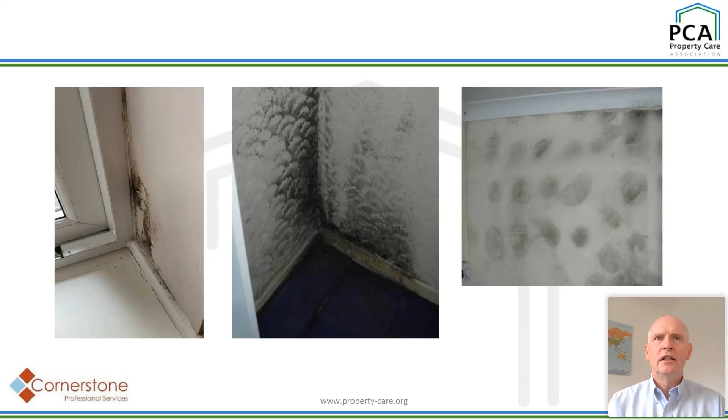There's not many certainties in this world, but there is, unfortunately, one, and it's that in just a few months' time from now, millions of people throughout the UK will be living in homes suffering from condensation dampness. Mould growth, streaming windows, damaged clothing will be found in homes up and down this country. It's been happening for decades, and if we're truly to deal with these symptoms, which can range from just being a minor irritation for the occupants up to, in seriously affected homes, some heartbreaking and tragic consequences.

Now, there's many factors which can contribute towards condensation dampness, and we all know that a lack of adequate ventilation is often a very significant one. There's no doubt that there's been good progress made in the last decade in terms of improving the knowledge of those of us involved in trying to provide adequate ventilation to UK homes. But the big question is, are we doing enough? And if we're not doing enough, what else should we be doing?

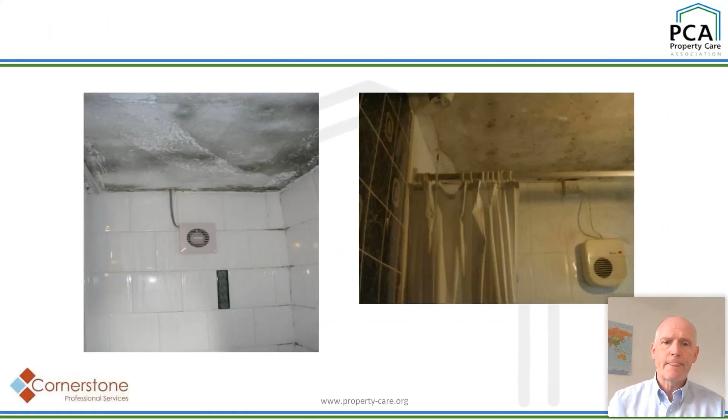So the course of the webinar this morning, what we're going to cover is we're going to look at what level of training and qualifications do we have at present in the UK? What do I think the level that we need to have and why we need it? And how and where can we get what we need?

So what level of training and qualifications do we have at present here in the United Kingdom? Well, I want to go a wee bit back in time, because the year 2010 was the origin, really, of what we have now. Back in 2010, I was entering, shows my age here, my 4th decade working in the ventilation industry. I was running a small ventilation business that was involved in going out into existing homes and trying to tackle condensation dampness problems.

There was a lot of new build going on back in those days, and we were fitting ventilation systems in new build homes, in particular mechanical ventilation with heat recovery. And we were getting involved in all sorts of specialist stuff. So that's what I was doing back in 2010.

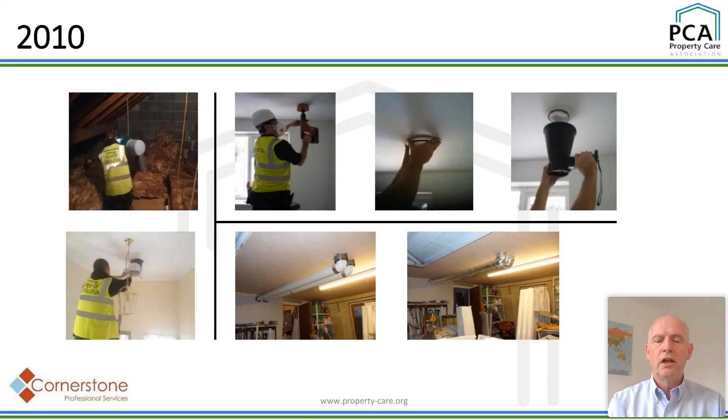In 2010, approved document F, which deals with ventilation, was published, replacing the 2006 document. The intention was to raise ventilation standards because, as mentioned earlier, for decades there had been problems with condensation and mould. That document was well regarded, looking at things like occupancy levels and giving good guidance with plenty of diagrams on how ventilation systems should be designed, especially focused on new build, but with some advice on existing dwellings too.

To complement that, a Domestic Ventilation Compliance Guide was also released, giving good information to people involved in the design, supply and installation of systems, especially for new build homes. It was considered a document at the time that would help raise the quality of installations and systems, particularly in new build homes, but also in existing homes.

Back then, an organisation called Polypipe, in conjunction with BPEC, launched the UK's first independently certified and accredited domestic ventilation installers training course - emphasising the word installers. That was to support the new approved document F and the domestic vent compliance guide. I was honoured to join a group of esteemed, knowledgeable people to speak at that launch, as someone considered, without sounding conceited, to know a bit about the design, supply and installation of ventilation systems as a contractor.

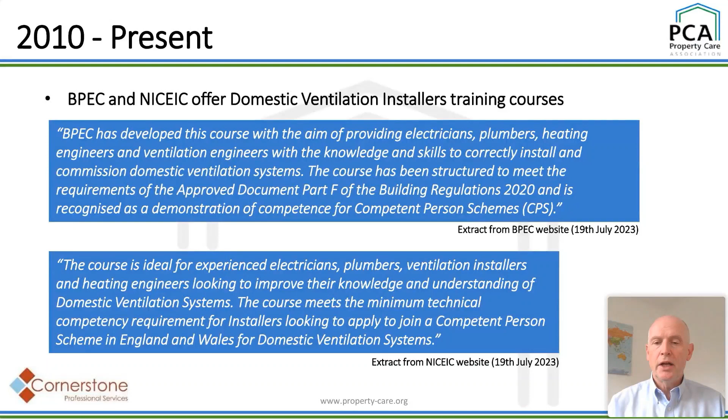What else has happened? If you look at what's currently available - remember when I talked about the origin, the very first BPEC course - we now have BPEC and NICEIC offering domestic ventilation installers courses. I've put up extracts from the various websites promoting these courses. It's a 2-day course, a good course if you're an installer who wants to be involved in designing, supplying and installing ventilation systems. But again, from the experience I have of people who've been on it and the feedback I've had, it's very much focused on new build homes as opposed to existing homes - though both organisations offer a very good set of courses.

If you look at what those courses can lead to in terms of qualification, and why they link to something called ventilation competent person schemes - on the left of this slide you can see a copy of a certificate for someone who passed that course this year, 2023.

You probably can't see, but if you were to look close enough, you'll see that it actually refers to the Domestic Ventilation Compliance Guide 2010, which I think is quite interesting, bearing in mind the new approved document came out in 2021 and came into effect last year, 2022.

But that's the type of qualification that's available to installers just now to join what would be called a ventilation competent person scheme. That would be the qualification ventilation-wise that they would look to support the criteria for joining a competent person scheme.

And the certificate that you've got in the middle of this slide is an example of a certificate from an organisation called NAPIT, from an organisation who's applied to be a member of a ventilation competent person scheme, which in turn allows them to notify to building control ventilation installations, like the notification certificate you will see in the top right hand corner.

Now it's a requirement to notify any ventilation you fit in an existing or a new build home. In an existing home, it would be notifiable if it can be tested and adjusted, and it's rare to find a piece of ventilation equipment now that doesn't have some form of testing and adjustment.

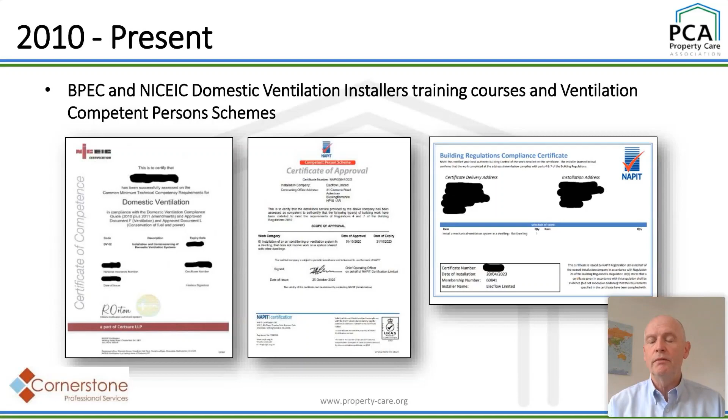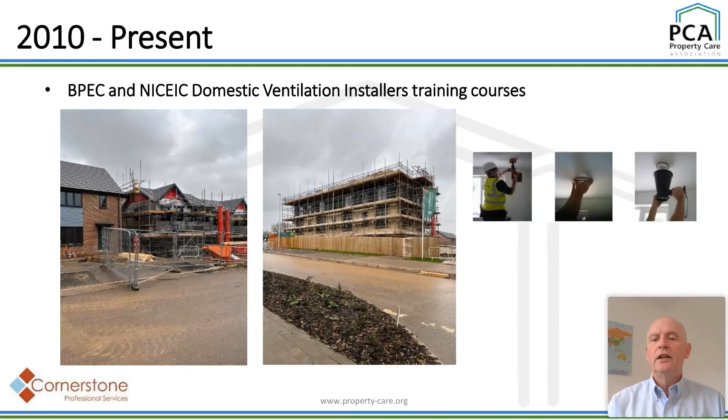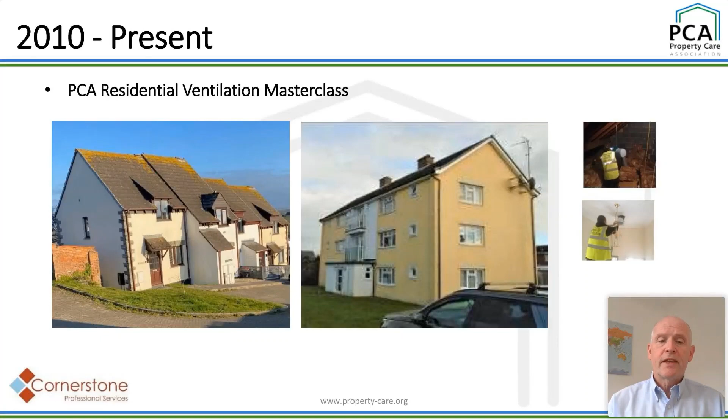I go back though to the fact that the existing BPEC and NICEIC domestic ventilation installers training courses are, in my view anyway, more suited to people looking at new build installations. When it comes to existing homes, I think that the PCA Residential Ventilation Masterclass has stood us in good stead for that as well. So that's the kind of background to what we've got just now.

So I'm now going to share with you my views in terms of what level of training and qualifications we need and why we need it. Well, I'm paraphrasing an old saying that we're all familiar with, but there's no doubt, I think, that if we keep doing what we've been doing, we'll get similar results. We've got to do things better, all of us involved within the industry in terms of tackling condensation and dampness.

I think we need more than minimum technical competency, because that tends to be what the level of qualification and training that we've had in the past aims for. And I think we have to go for more than minimum technical competency. I think what we need in the UK to truly tackle these issues is a large pool of suitably trained and qualified specialists. We need specialists if we're going to make the progress that we need to make in preventing and solving problems related to inadequate ventilation in our houses in the UK.

So if I was saying, what does a specialist look like? I think we need specialists who are capable of doing all of the following, and some more stuff on top, capable of looking at properties from the time that they are new dwellings to the time they become existing dwellings. And that's a very short period of time, remember, it can be hours before they become an existing dwelling, because as soon as people walk in that door, it's an existing dwelling.

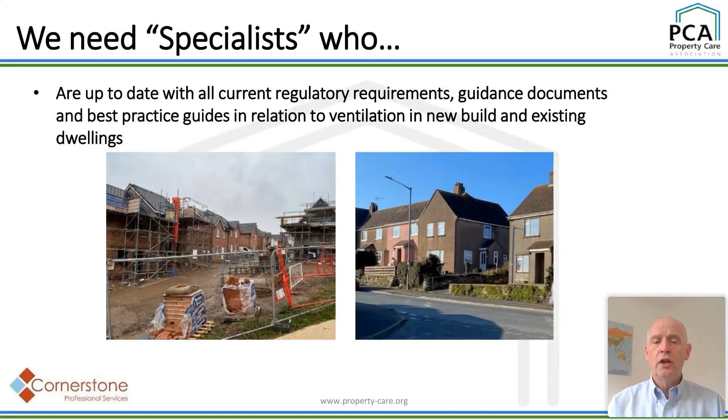I think we need people who are able to design and specify any of the three main types of ventilation, which are detailed in Approved Document F and all the other documents and guidance for the different parts of the UK for new build dwellings. They need to be capable of knowing what a ventilation system is like for a new build dwelling.

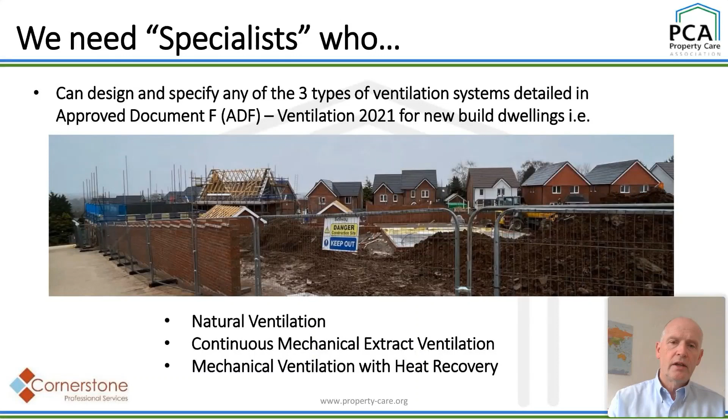It used to be called in the old regulations background ventilators and intermittent extract fans, but that is essentially a natural ventilation system. It's a ventilation system that relies on background ventilators, the most common of which would be trickle vents, and windows and doors left open during winter to allow the building to ventilate naturally through a combination of stack effect and wind effects. And that has to provide the whole dwelling ventilation rate naturally.

The extract fans, the clue's in the name, they're intermittent. They're really only used at times of high moisture or pollutant generation to give additional extract within the wet rooms. That form of ventilation has maybe not enjoyed the best record of success over the years, perhaps understandably because people can't see the benefit, maybe see a contradictory message that we have to leave trickle vents open in double glazed or triple glazed windows in the middle of winter when the perception might be that we should be keeping the heat in.

The next form of ventilation is continuous mechanical extract, which is extract from the wet rooms, where the replacement air either comes in through background ventilators in the rooms that don't have extraction, or from the building fabric itself, or a combination of both. And the extraction can either be from a centralised extract unit or individual extract fans within the wet rooms, or a combination of both. And that method is gaining a good track record in providing adequate ventilation in homes.

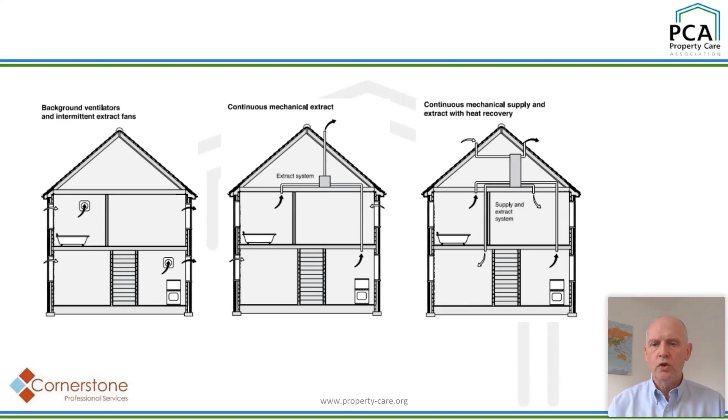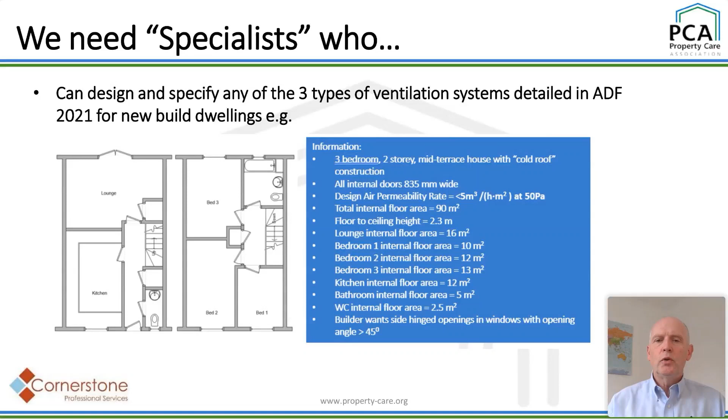But then we have the real issue, existing homes. As I said earlier, we have 27 million, give or take a few million, existing dwellings. And any new build dwelling becomes an existing dwelling very soon when people move into it. So we need specialists who are able to correctly diagnose condensation dampness and differentiate it from other forms of dampness in an existing dwelling. They need a good understanding of psychrometry, specifically in relation to water vapour and air, and be able to distinguish between those forms of dampness and know how to use the tools available to do so. Because it's existing homes where the problem is.

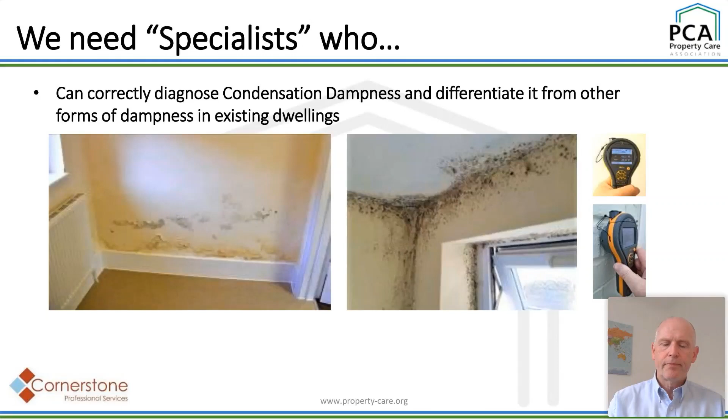They've got to have also an understanding that there's other indoor air pollutants in addition to really excess water vapour. Specialists will understand, when they've had the training and the knowledge, that very often you will have lots of other pollutants, and very often, for example, in VOCs, volatile organic compounds, the amount of ventilation you need to control those to acceptable levels to demonstrate adequacy of ventilation can often be higher than what you would need to control water vapour.

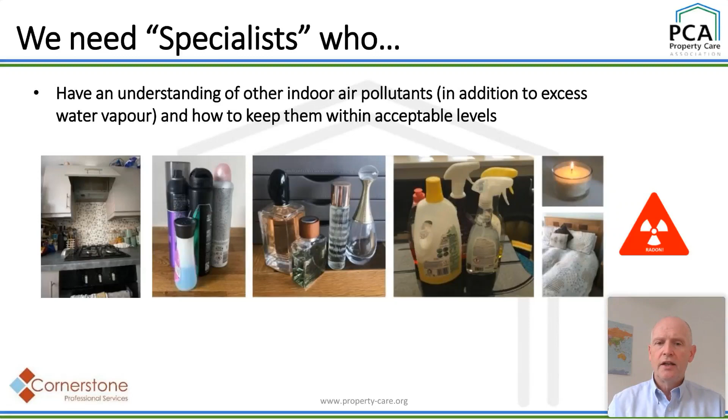And of course, you have to provide the higher of both, because there's no humidity control ventilation system that's only humidity control that is going to control VOCs to the level they need to be controlled for adequacy. And of course, excess VOCs can lead to respiratory conditions.

We don't just have axials and centrifugals and mixed flow. We have constant volume ones, we have continuously running ones, we have alternate flow ones, we have positive input ventilation ones. We have such a variety, and sometimes we have lots of combinations of those, all fitted into different dwellings, sometimes all working against each other.

I go into plenty of properties where there is some amount of air going through that building and there's still mould. It's not through a lack of air movement going around the building, it's just it not being done properly, because sometimes you can get ventilation systems fighting against each other. But of course, you've got to identify what's there in the first place, and they all perform and can be measured in a different way depending on what type of ventilation system or product it is.

Just talking of products, one thing I would say at this stage is that over the past few years, the manufacturers of products, I think, have done a great job. When I talk about product manufacturers, I'm talking about the people that provide us with the diagnostic tools, the ventilation equipment, the manufacturers of fans and mechanical ventilation systems, the people that provide us with background ventilators by way of trickle vents, and the people that provide us with airflow measuring instruments. They have given us all in the ventilation industry incredibly good products to work with.

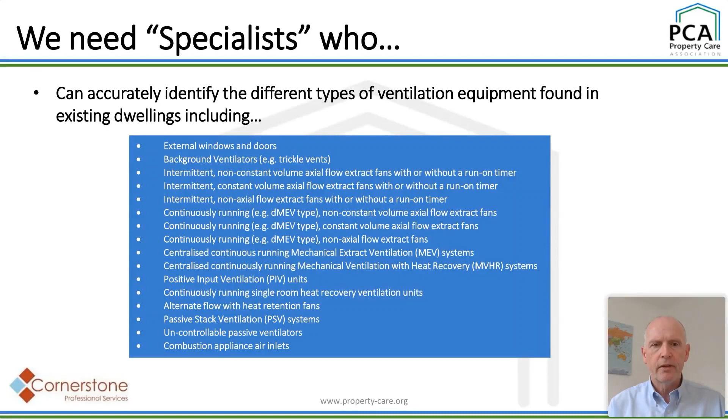I think a big issue we have to consider going forward, and a specialist has to be aware of at least, is the issue of air permeability and infiltration within an existing dwelling. If you look through Approved Document F, there is a big emphasis in trying to identify what the assumed or design air permeability is. That determines how you go about the ventilation. There is a big focus in new dwellings regarding infiltration, but there isn't really much when it comes to considering it when we look at ventilation in existing dwellings.

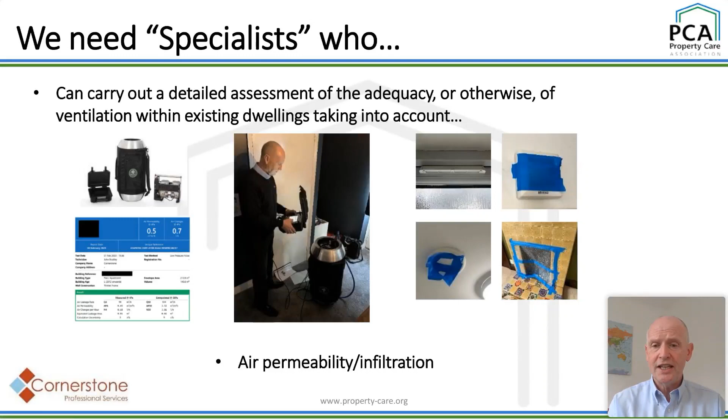He or she also, as a specialist, I think, has to be able to go in existing dwellings and evaluate purge ventilation measures in habitable rooms. They have to know that purge ventilation is really urgent. It used to be called rapid ventilation. When you need ventilation quick, you're trying to get about 4 air changes an hour really quick.

It could be where there's really excessive pollution within the property. It might be painting and the like. It might be excessive moisture for a short period of time, and you need rapid purge ventilation quickly within habitable rooms. And of course, that's normally provided via openable windows or doors to the outside. Now, if you go in and evaluate that, there are certain opening requirements in relation to the floor area of the dwelling that we have to comply with.

So when I go in and do a ventilation adequacy assessment, and I would suggest that any specialist who does has to be trained to go in and measure opening angles, and realise that regulatory-wise, the guidance documents say that if you have a window that only opens to 15 degrees or less, you can't even count that towards the floor area of purge ventilation.

If you've only got between 15 and 29 degrees of opening, you can only count half of that towards, say, the 5% floor area of that habitable room. And it's only when you go above a 30-degree opening that you can count the opening area fully towards purge ventilation. We need specialists to be able to go in and do that and identify if there's sufficient or insufficient, adequate or inadequate purge ventilation measures in habitable rooms.

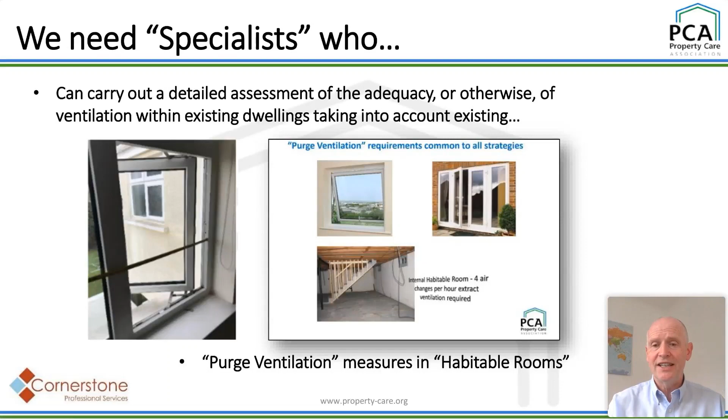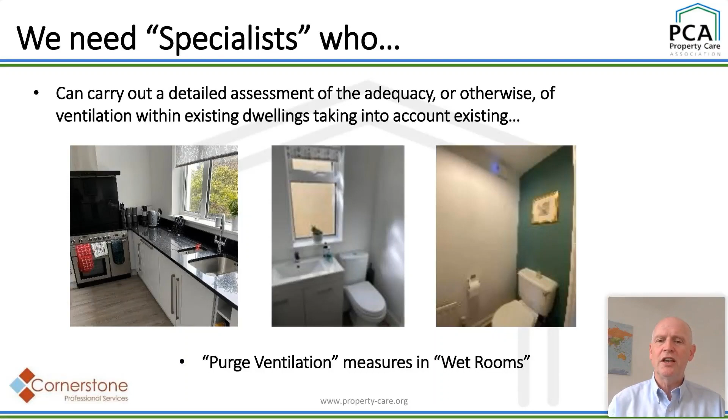We need specialists who can carry out the same sort of assessment within wet rooms. So I'm not going to bore you with going through all the criteria that I've talked about before, but wet rooms are a bit more relaxed when it comes to purge ventilation requirements, because generally speaking, if you've got an openable window, you've got purge, and if you've got mechanical extract, you've got good purge in there as well. But they've got to be able to evaluate it and identify if that purge ventilation is appropriate or not.

I think we also need specialists who can carry out a detailed assessment of the internal air transfer measures. We have to go around and measure the door undercuts. We have to take a view if small door undercuts are acceptable or not. In my view, we have to train specialists to look at with what type of ventilation systems we can adopt a more relaxed attitude towards door undercuts, because we have to consider maybe a more relaxed attitude where we have door undercuts where, for example, there might be fire doors.

Where we can't have a door undercut, we have to consider issues like transfer measures using intumescent grills and the like. But again, we need specialists who can go out and evaluate that, because it's absolutely critical that air is allowed to move throughout a building if we're to ventilate it properly.

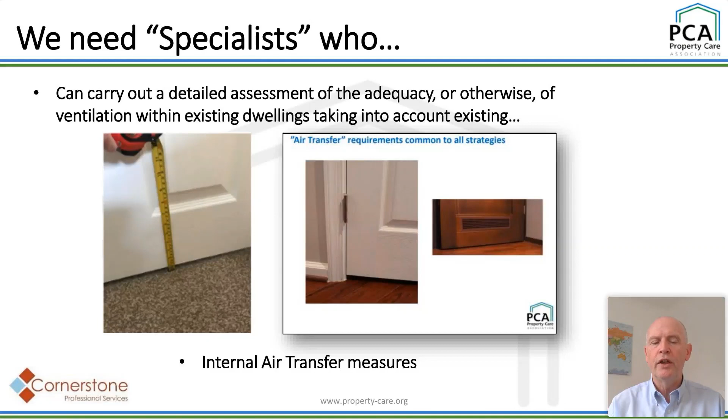We need people who can look at the extract ventilation measures within wet rooms. They have to be able to go in there, and depending on the type of system, they have to know if that intermittent fan is up to the job, or the continuous running fan is up to the job, and be able to evaluate that and identify if it's adequate or otherwise, categorising it always within what method of ventilation they are assessing it against.

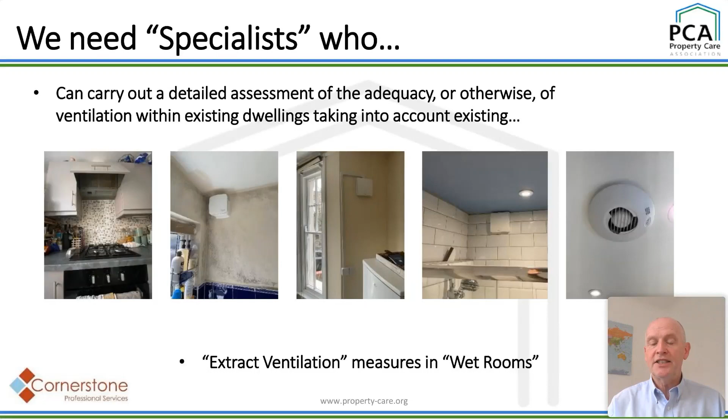And then we need to take into account what I think is the absolute critical factor when it comes to trying to either prevent condensation happening in a new build home or resolving it in an existing dwelling. And this is this term called whole dwelling ventilation. In my view, and in my experience, if we can get that whole dwelling ventilation right, both in terms of the amount of air that we move through a property 24 hours a day, 7 days a week, and how we move it through the property, all the other things are a bonus. Purge ventilation is a bonus.

Extract measures that are used occasionally in wet rooms, an extra bonus. Purge ventilation in wet rooms, a bonus. If we can get this whole dwelling ventilation measured, this in my experience is the single biggest thing we can do to try and resolve some of the big issues we've got with mold growth, streaming windows, all the usual stuff that goes with a poorly ventilated property.

Now, they have to be able to assess that whole dwelling ventilation against a benchmark of something, and benchmarking it against a method of ventilation is what a specialist has to be trained and have the knowledge to be able to do. So, for example, if it's a natural ventilation system, that specialist has to go around and measure all the background ventilators in each room.

And then if the equivalent area in millimetres squared is not on the actual background ventilator, the trickle ventilator, they have got to do an assessment of that using a particular protocol that they may have. But they have to go around and look at the background ventilation measures in every room.

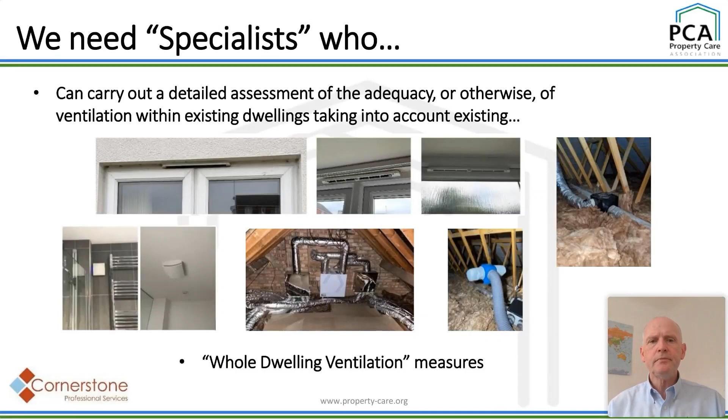Because we have to measure installed ventilation, we need people who can accurately measure airflows and know how to use the instruments available to us—hooded anemometers, thermal hot wire anemometers where you can't get the hood over the fan, and know how to traverse things like cooker hood extract grills when you can't get it round, working out the flow rate from the airspeed.

There are different techniques needed. They need to know how to measure ventilation equipment accurately, and how to adopt protocols when the equipment itself creates a reduction in actual flow when a hood is attached. They need protocols, for example for axial flow fans, to make sure that when they measure a fan that seems not to be achieving the flow rate, it actually might be.

So you need to know how to do that, and specialists need to know how to use that instrumentation properly.

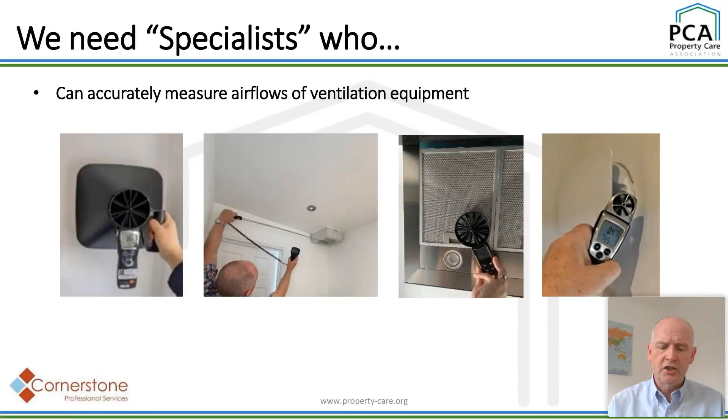We need specialists who have a good understanding of what's involved in the installation, commissioning, certifying, and maintenance of all types of ventilation systems in new build and existing dwellings. They need to know what happens from the time it's designed on an architect's drawing all the way through maintaining it through its lifecycle, and everything in between. If you're truly a specialist, you need to know it from beginning to end—that's any field of professionalism. Specialists know their subject inside out and everything that goes with it.

We need them to have an understanding of the design, installation, commissioning, certification, and maintenance of it, all the way through from the time it's an idea of what the ventilation might be, right through to that first six months after, where you've got to maintain, or at least give a good clean to a mechanical ventilation with heat recovery system, and know what's involved in all that, including the site practicalities.

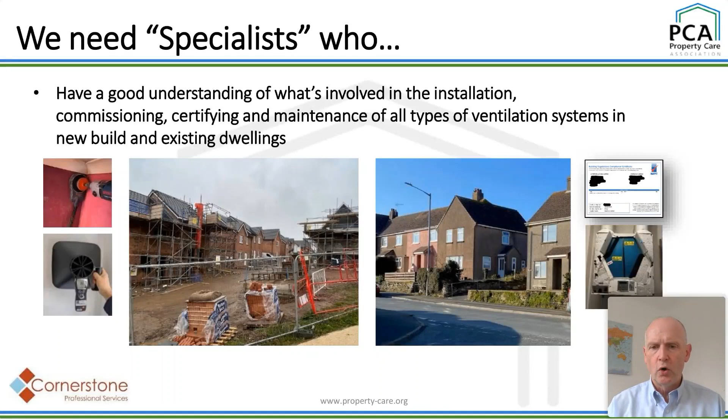I think we also need specialists who are always mindful that Approved Document F 2010, the old document, and the more recent 2021 guidance, make quite a few assumptions in terms of what the ventilation requirements and therefore adequacy are based on. It's actually really interesting that it's based on ventilation for people only, assuming a certain thermal insulation of a building, a properly heated dwelling, and typical moisture generation. You can argue whether these are right or wrong assumptions, but they are the assumptions all the ventilation rates in the approved documents are based on.

However, I think a specialist has to face what we face when we go into properties, and needs the ability, if required, to make adjustments to assessments and recommendations which take into account specifics related to dwellings, such as animals that produce significant quantities of moisture. Large dogs, small dogs, cats, fish tanks, they all produce moisture.

They also have to take into account that the vast majority of dwellings are existing, and therefore won't have the same thermal efficiency as new build dwellings that building regulations assumptions assume exist. If you've got a building with high U values and poor thermal efficiency, you've really got to look at providing extra ventilation to drive down the dew point and stop condensation happening. So you've got to have the skill to know what to do when there are extra occupants of the building other than people, for example pets.

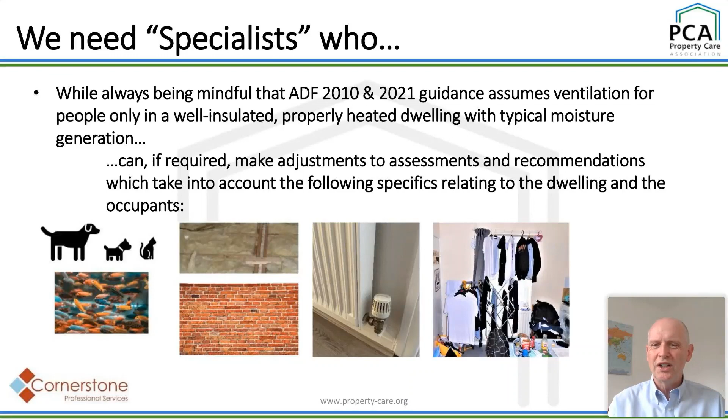I think what we have to have is specialists who can then specify the additional ventilation measures necessary to provide adequate ventilation systems in a dwelling, by means of one of the three main types of ventilation covered: natural ventilation, which we've talked about, continuous mechanical extract, and MVHR, mechanical ventilation with heat recovery. But also, because most of us here know, although it's not mentioned within any of the approved documents, and I'm not really sure why, there's positive input ventilation.

Many of us believe that positive input ventilation is a good method of providing the type of ventilation we need in existing dwellings to resolve problems in particular. We need people that can go into a property and look at what's already there by way of existing ventilation measures, and what we can do, or need to do, to bring ventilation up to a level of adequacy by the extra bits we need to add on. Because that's the clever bit, is looking at what's there.

First of all, you've got to diagnose that it is a condensation dampness related problem. Then you've got to identify the easiest way to get to adequacy based on what's already there, because we want to use what's already there as best we can. Pick one of the methods of ventilation to go for, then add the additional ventilation measures to make sure that what's there, combined with what we think needs to go there, between all of those ingredients, we'll be able to demonstrate adequacy.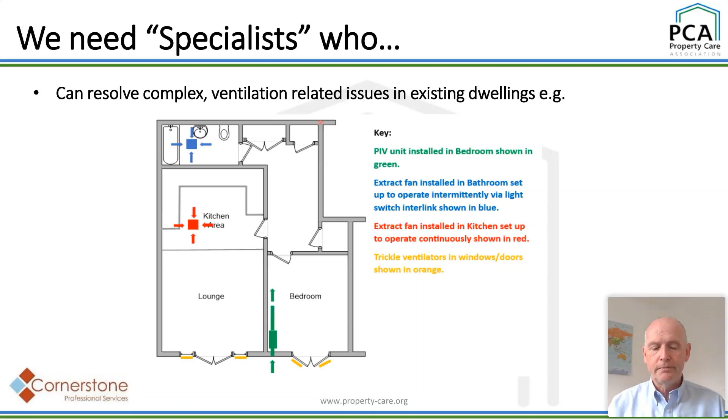It's not the most interesting reading, granted. My wife sometimes thinks, why am I reading all this sort of stuff? I must have better things I could be reading. But if you're going to become a specialist, you need to read that sort of stuff and understand it. I'm not saying you need an encyclopedic knowledge of it, but you should at least know where to look for the answer and the guidance. Those guidance documents already exist.

I would encourage anyone to go to any kind of course that you can go to. The very fact you've turned up here today suggests that you're really interested in doing it. There are loads of courses available, in-person courses, online, webinars like this one. I'd encourage anyone, particularly if you're looking at becoming a member of a ventilation competent person scheme and doing more work in new build, I think the BPEC and the NICEIC courses are really good ones to give you a good basic, minimum technical competence level to do that.

And of course, within the PCA, we have loads of courses on all sorts of stuff related to dampness and condensation, and there are so many courses available through us and other organisations as well.